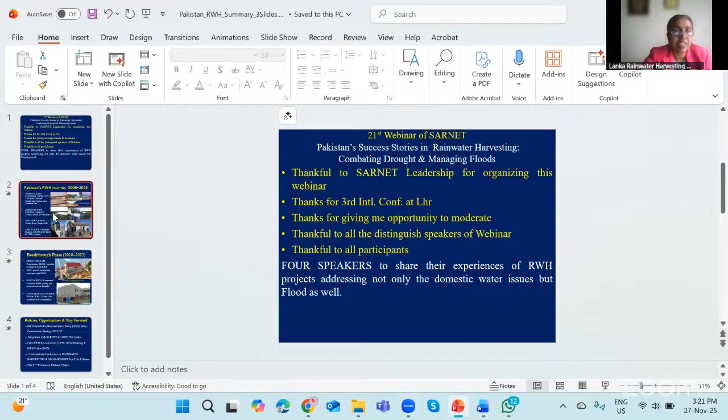So very quickly, the Pakistan scenario: since 1950 till today, we have declined our water availability. Initially, it was around 5,000 cubic meters per person. Now it is around 800 to 1,000 cubic meters per person. Can you stop, speakers? I think it is reflecting my voice.

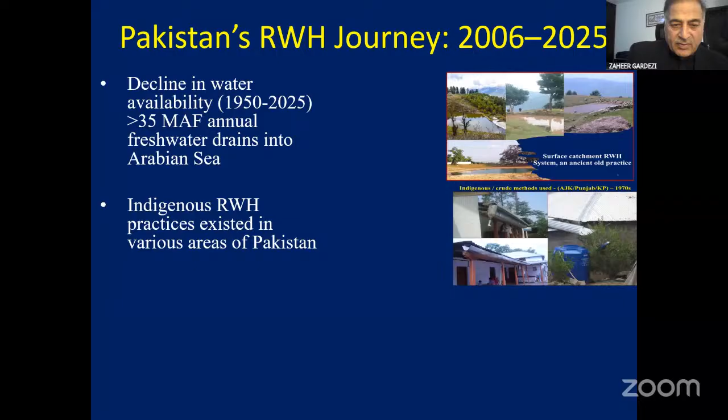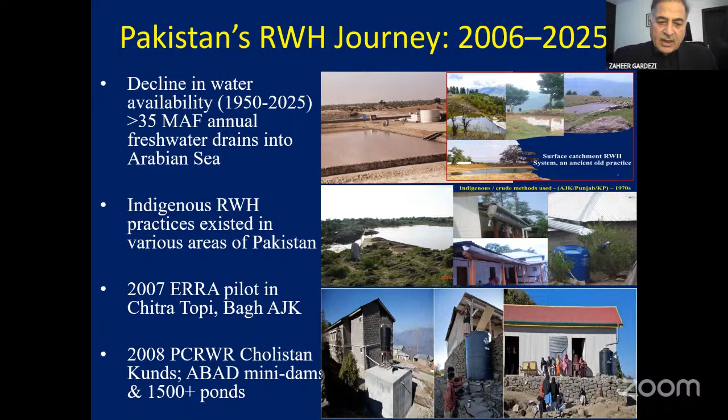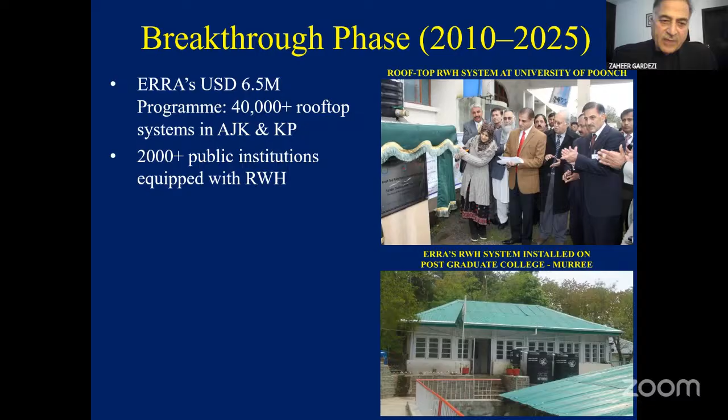Rainwater harvesting is an indigenous practice that was there in Pakistan, but since 2007 onward, after the earthquake of 2005, you can see these kind of initiatives were taken in Pakistan by the Earthquake Reconstruction Rehabilitation Authority, PCRWR, Agency for Barani Area Development, and other organizations. The largest ever initiative was after the earthquake of 2005. It was a $6.5 million program under which more than 40,000 rooftop rainwater harvesting systems were installed on private houses and more than 2,000 public institutions. And then it continued, and we have been replicating this project in many other projects.

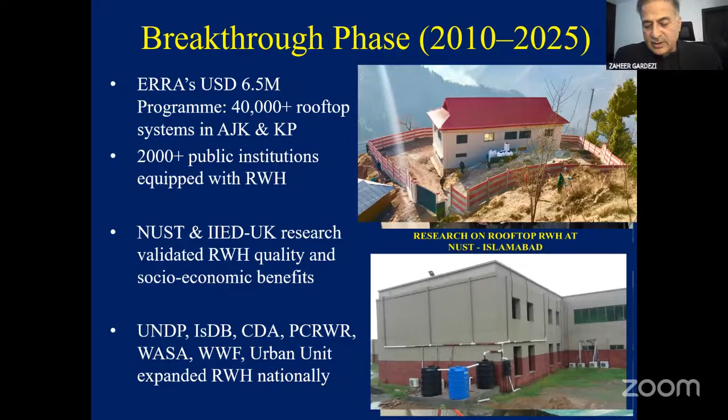Now UNDP, Islamic Development Bank, Capital Development Authority, PCRWR, Water and Sanitation Agencies, WWF, Urban Unit Punjab, and Shehersaaz, and many others are working on this. So this is a journey of almost 20 years. Now we have the water policy at the moment in Pakistan, and we have a water conservation strategy in Pakistan, to be implemented from 2023 to 2027.

Integration with SARNET and Lanka rainwater harvesting is done. Capital Development Authority has approved its bylaws. Pakistan Engineering Council has approved its green building codes and rainwater harvesting codes. It's a big achievement for Pakistan, I think. And as Danushi mentioned, we held the third international conference on rainwater harvesting in September this year. It was again a success story. And now today we are here for this webinar. So this is a quick overview of Pakistan's journey of rainwater harvesting.

I am Tayyab Malik, representing Water and Sanitation Agency Lahore. Thank you for introducing me and my organization. Today my topic is urban flood management and rainwater harvesting, and what Water and Sanitation Agency Lahore is doing.

It was established in 1976 with a mandate of provision of water supply, sewerage, and drainage services in Lahore. Initially, this agency was created under the development authorities. Now, at the start of this year, there is a change in the governance and institutional structure of the agencies. Government has now established a new water and sanitation authority in Punjab.

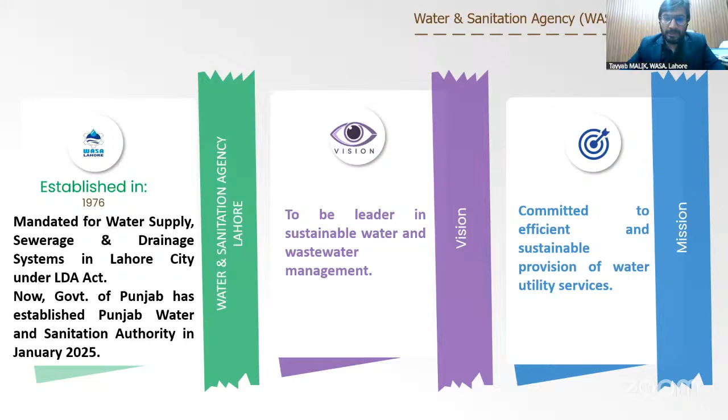Let me brief about the drainage system of Lahore. Basically, it depends upon the primary drains. There are about 7 or 8 primary drains in Lahore. Initially, these drains were constructed for the purpose of stormwater drainage, but with the passage of time, urbanization, and unplanned infrastructure, these drains were converted into sewer carriers. Now these drains carry both stormwater and sewage.

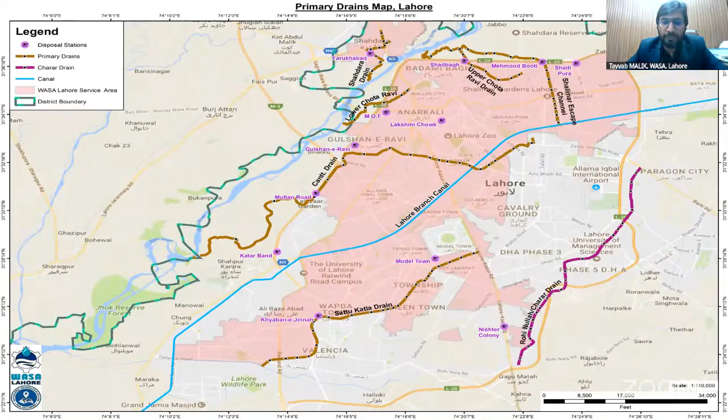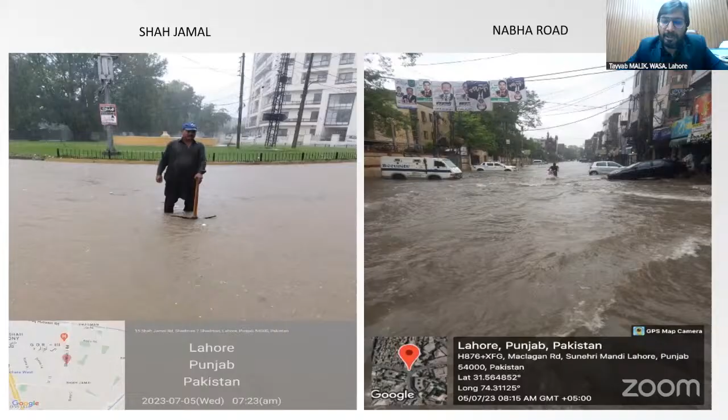What challenges are we facing in terms of urban flooding, and to cater to the monsoon? I would like to share that we have a combined sewage and drainage system. We don't have a dedicated, separate sewage or stormwater drainage system. Climate change, as we all know, is causing a lot of changes, and we are facing intense rainfall events in Lahore every year.

I have a slide where I will share details of the major and maximum events we have faced during the last 7 or 8 years: unplanned urbanization, higher impervious area, and topography. Topography is also a very major component affecting urban flooding. The topography of Lahore is totally flat, and due to infrastructure being built, we are facing a number of depressions which are causing urban flooding.

Parks and green areas are very limited. Two or three months ago, we calculated that about 9.8% of the urban area of Lahore is green area. The rest is totally covered with concrete structured roads and buildings.

Roadside drainage is also not good; we have less focus on roadside drainage. We have a lot of solid waste dumping in the sewers and open drains, and we have to mobilize a lot of resources for these activities throughout the year.

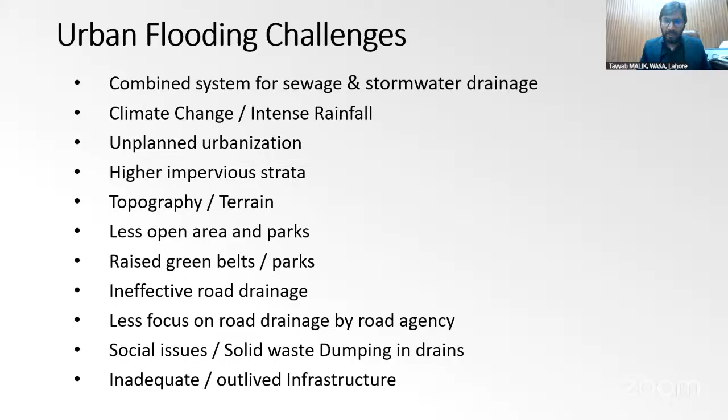I remember the day. I woke up early morning at about 4:30 a.m., and when I went to the terrace and looked at the streets, it was really a disaster. Normally, I have not faced any urban flooding in my street, but that day there was a lot of water. The first thought in my mind was that it was a disaster day for WASA Lahore.

Then we implemented multiple initiatives at WASA Lahore level. We have also encouraged domestic and commercial levels to implement rainwater harvesting. We have constructed recharge wells, and we are also remodeling or redesigning our trunk sewage system.

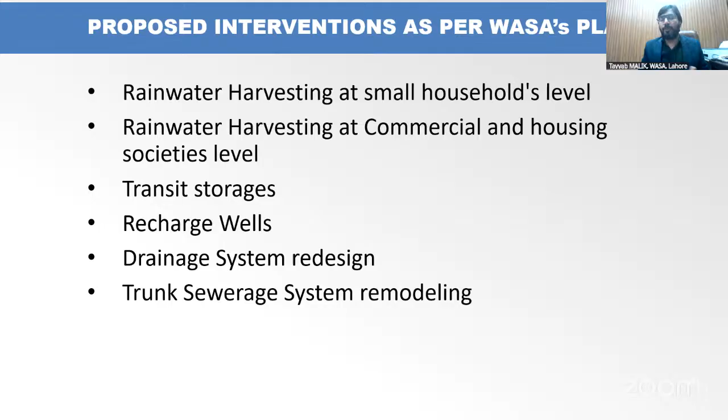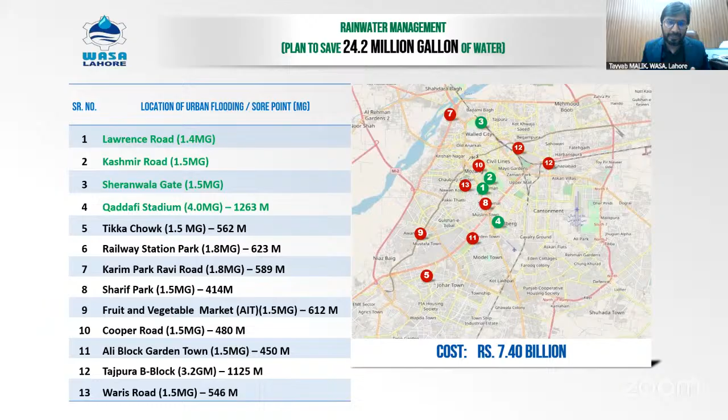What WASA Lahore has done over a few years: we have constructed about 13 underground stormwater storage tanks with a huge capacity, about 24.2 million gallons. The green ones are highlighted on the left. They were constructed over a period from 2019 to 2023, and the rest, numbers 5 to 13, we have constructed in the last financial years.

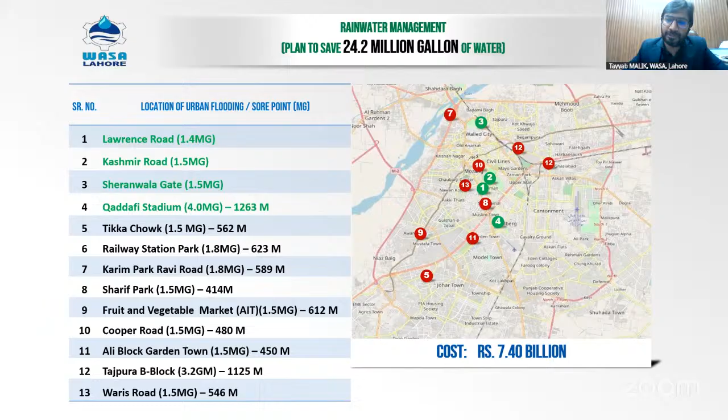All the underground storage tanks are operational, and we have constructed them in open spaces. Most of them are constructed in the parks, and after the construction of the tanks, we have restored it into a park. You can see the first one we have constructed in a garden, and after the construction, we have restored it as a lawn tennis court. Then there is also an underground storage tank. You can witness how professionally or beautifully we have established and restored the park.

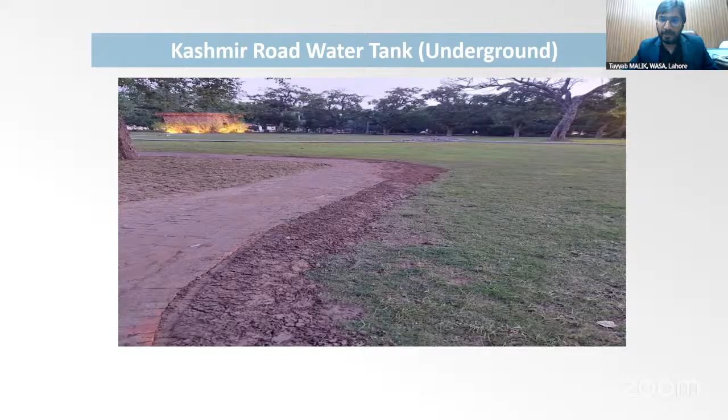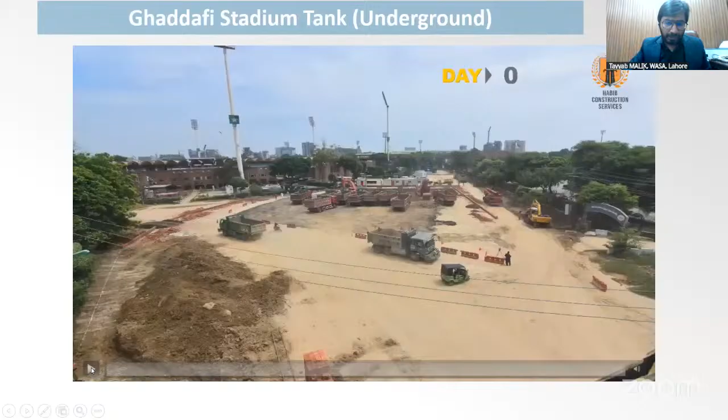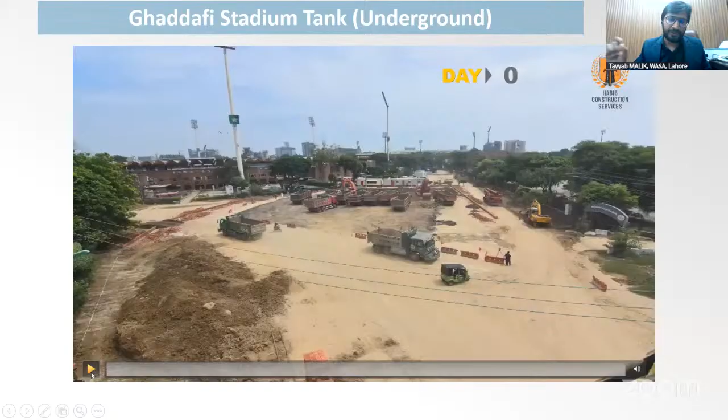These are some pictures of the execution of the stormwater storage tanks. Here I have a small video. We have constructed one of the largest storage tanks at Qaddafi Stadium in Lahore. Its capacity is about 4 million gallons. You can see we have constructed this tank because we have a Champions Trophy mission. Then after the construction of the tank, we have restored the road. No one can see the underground storage tanks.

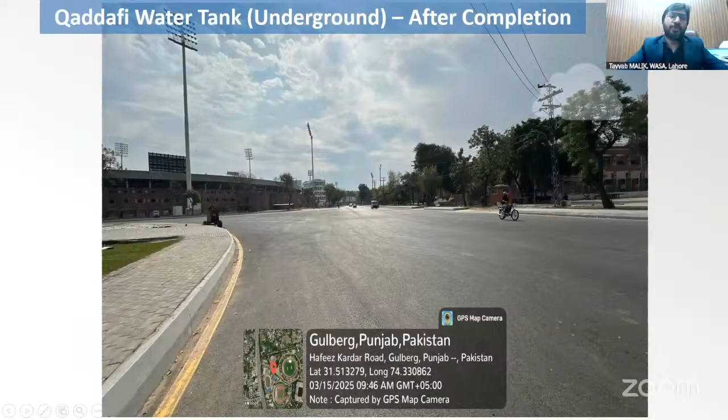The other initiative we have implemented, we have also installed a rainwater harvesting system in our multiple offices. We have connected the rooftop with the storage tanks, and after the rain and in the dry weather season, we are using the storm water stored in the tanks for gardening purposes.

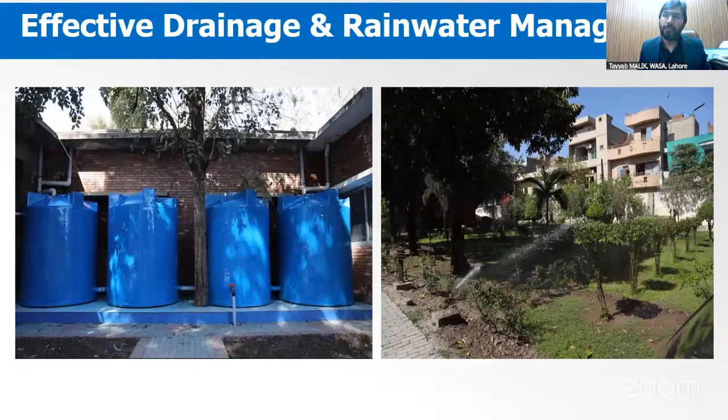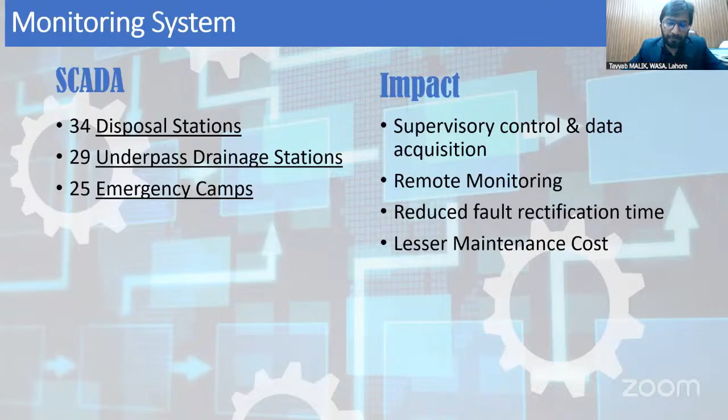We have also improved our system by installation of SCADA in our installations. WASA Lahore has huge installations. We have about 128 disposal stations in Lahore, and for proper monitoring and decision making for resource mobilization, it was a very good milestone we have achieved during the last 1 or 2 years. We have also established a control room. You can witness multiple top management from the Government of the Punjab visit it, mainly during the monsoon and emergency situations.

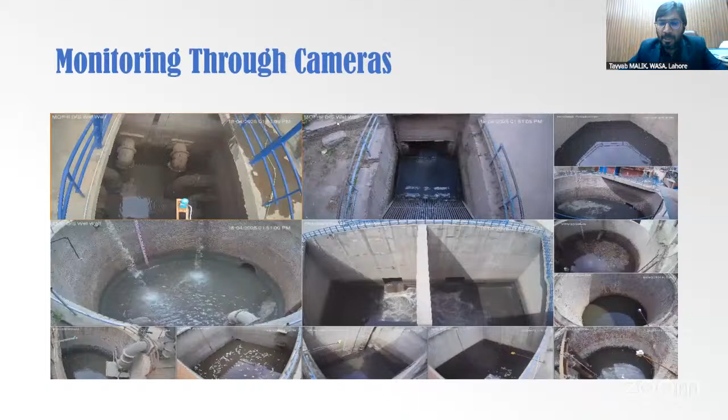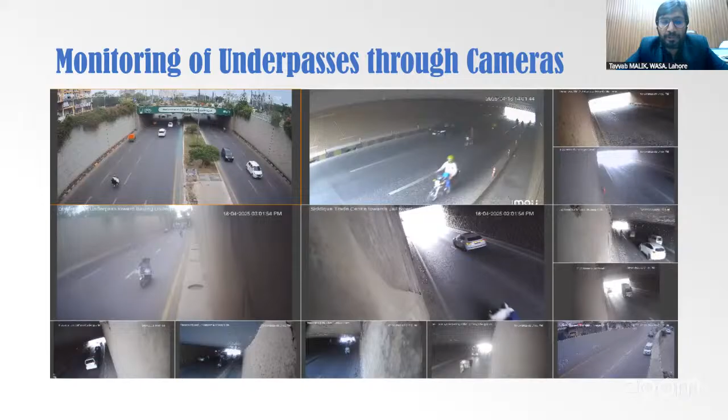You can witness we have installed multiple SCADA systems in our disposal stations, our installations, and underpasses. We have also installed cameras at underpasses to know the real position of the urban flooding in the underpasses, because we have installed lift stations adjacent to these underpasses in order to make sure the traffic flow is smooth during the rainy season.

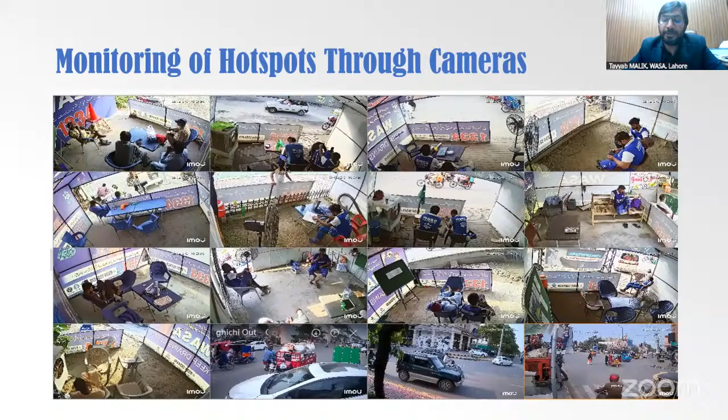Then we have also installed monsoon camps. These are temporary camps, only installed during the monsoon. Then we remove and store them, and we can reuse them for the next period.

Then this is the last one I would like to highlight. We are also implementing a project laying the trunk sewer system by the use of a tunnel boring mechanism. This project is approved and it's in the tendering phase, and hopefully within 3 or 4 months this project will be on ground. Its length is about 21-22 kilometers. At the end, we are going to construct a disposal station. This system will be laid in the central part of Lahore, which is totally crowded, and there is no space for excavation.

At the end, I would like to highlight we have also implemented recharge wells in Lahore. We have constructed three in central Lahore and three in the Johar Town area. This idea was very much appreciated by the government, and the government has planned to replicate this idea in other cities.

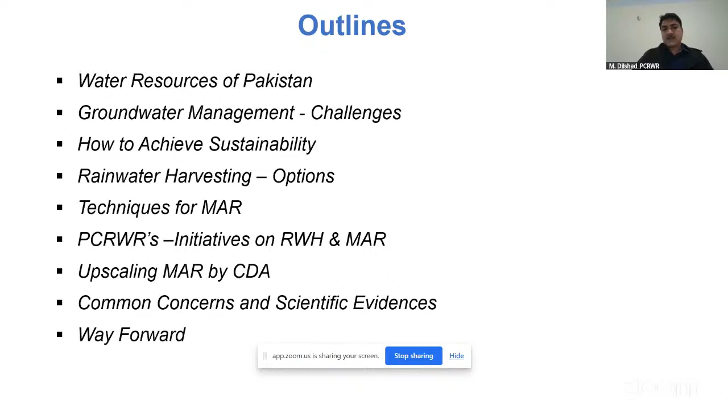So my presentation outlines are to cover the water resources of Pakistan, groundwater management challenges, and how to get sustainability, the rainwater harvesting options, the techniques for MAR, the different R&D initiatives taken by the PCRWR on rainwater harvesting and MAR, and their upscaling by different agencies like CDA, the common concerns and the scientific evidences, and lastly, the way forward.

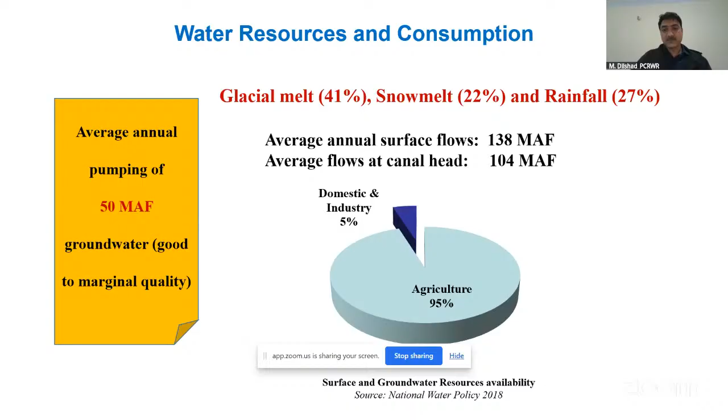So if we look at the overall water sources of the country, we receive annually on average 138 MAF surface water, and we rely on 50 MAF of annual pumping to fulfill the needs of our agriculture, domestic and industrial sectors. For groundwater resource management and the challenges, the number of tube wells currently operating counts for 1.4 million, out of which 85% are installed only in Punjab. The Punjab Irrigation Department conducted a survey in 2024 and completed the georeferencing of tube wells, which now number about 1.3 million, up from 1.1 million.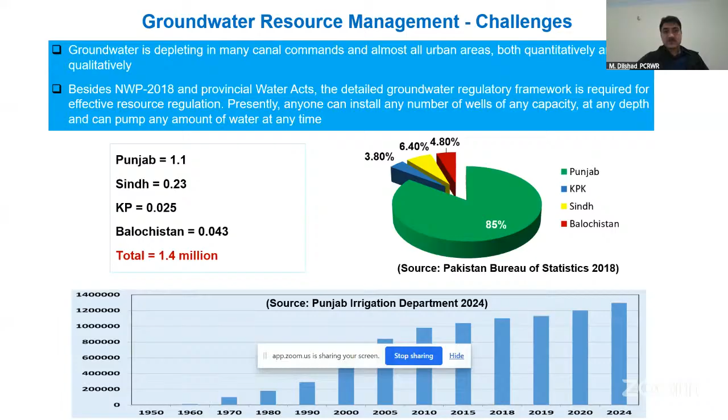So overall, groundwater is depleting in many canal commands and almost all urban areas. And besides the National Water Policy 2018 and the Provincial Water Acts, a detailed groundwater regulatory framework is still required for effective resource regulation. We are also facing climate change and urban flooding, as my colleague reflected about the Lahore situation in the monsoon. Similarly, in Islamabad, the E11 example is there, and in all metropolitan cities we are experiencing this kind of flooding in the monsoon.

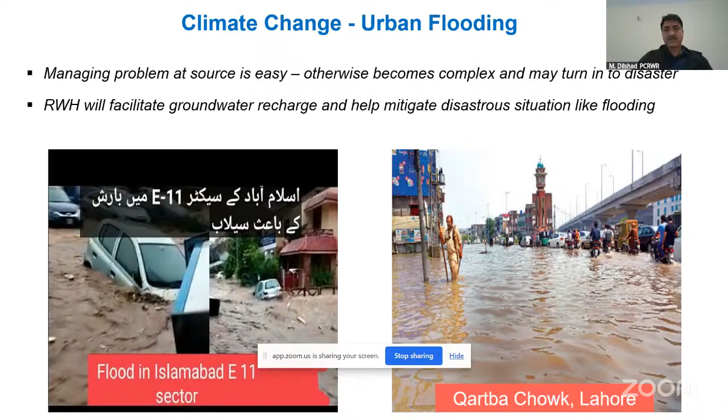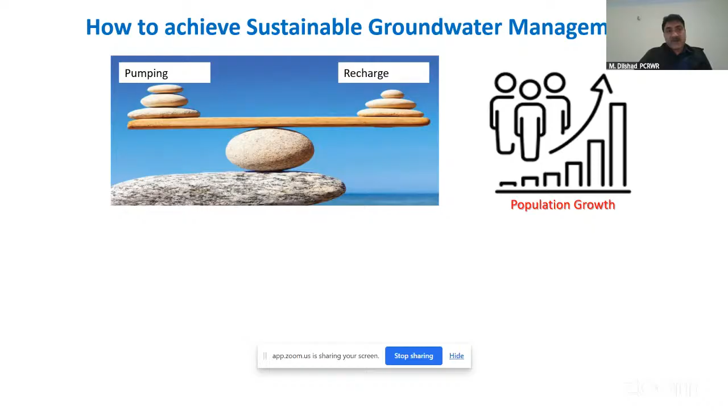So how to achieve sustainability in groundwater? On one side we are depleting our aquifer, and on the other side, in the monsoon, there is an abundance of water. Sustainable management of groundwater needs a balance between pumping and recharge. We can manage it either by reducing pumping and optimizing water requirements, or by enhancing recharge of the aquifer through nature-based solutions. The National Water Policy and the Provincial Water Acts highlight the need for resource conservation and regulations, ensuring sustainable groundwater management.

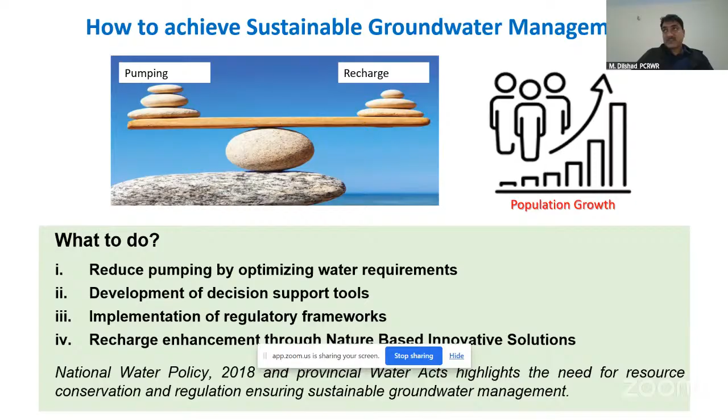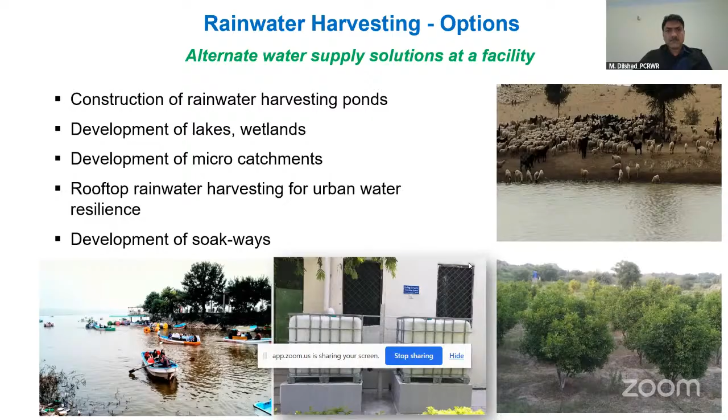So here are the managed aquifer recharge techniques. There are different kinds of techniques, implemented based on the hydrogeological and surface conditions. Every technique is not feasible everywhere, so according to the different hydrological conditions, different techniques are applicable.

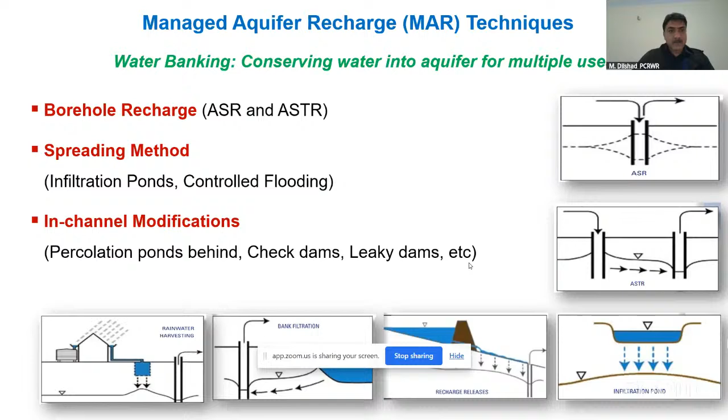So now I would like to particularly highlight the R&D initiatives focused on rainwater harvesting and managed aquifer recharge carried out by the PCRWR across the country. We have developed demonstrations for urban areas as well as for the arid to hyper-arid areas of the country, like the deserts, the Cholistan desert, the Thar desert, and even in Balochistan and KP. So I will go quickly through them one by one.

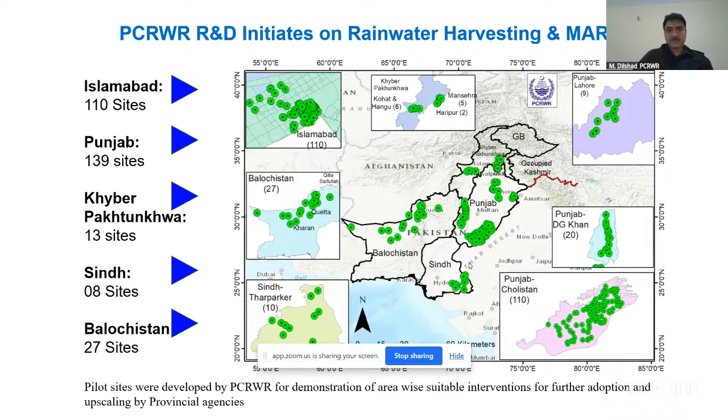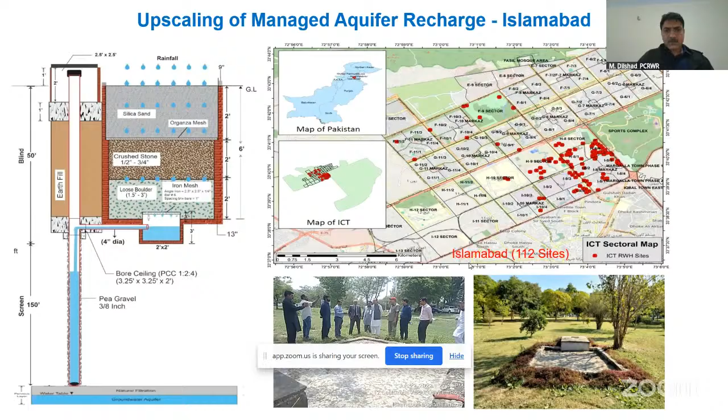So here is just a video of how the recharge well works. I guess I have to pass it quickly.

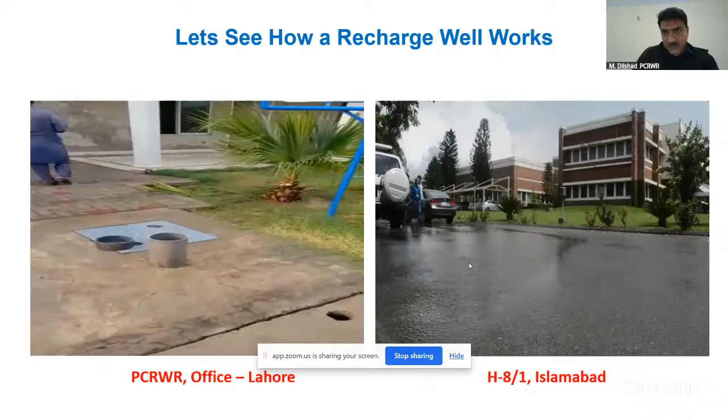We can see that after passing the filtration plate, clear water is going into the bore with appreciable velocity and quantum of water, and the bore is simultaneously accepting the whole flow and quickly recharging it. So this is how the recharge well works. After completing the 112 sites, the overall cumulative recharge quantum achieved so far is around 214 million gallons, recharged by the CDA sites in Islamabad.

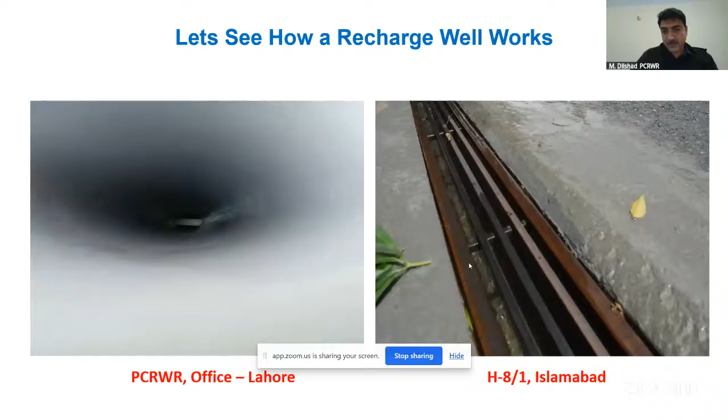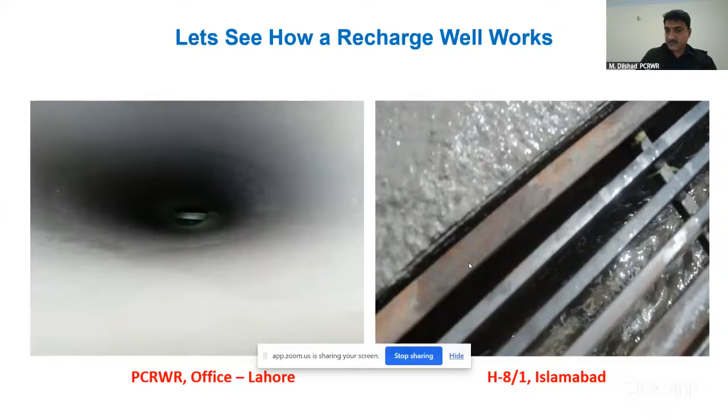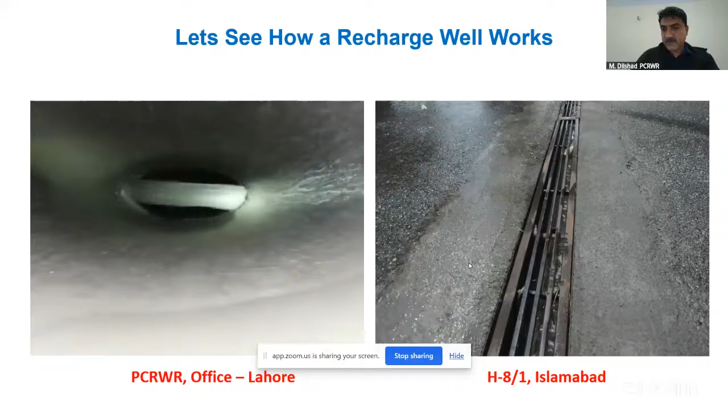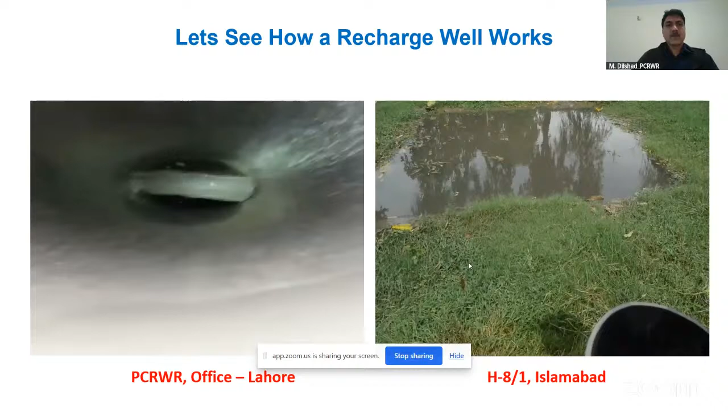If we talk about the economic analysis, the cost per unit volume, we have evaluated that at PKR 10 per 1,000 liters you can achieve the recharge through these kinds of interventions. Simultaneously, we worked on rooftop rainwater harvesting and demonstrated successful pilots in Islamabad and in different areas of the country.

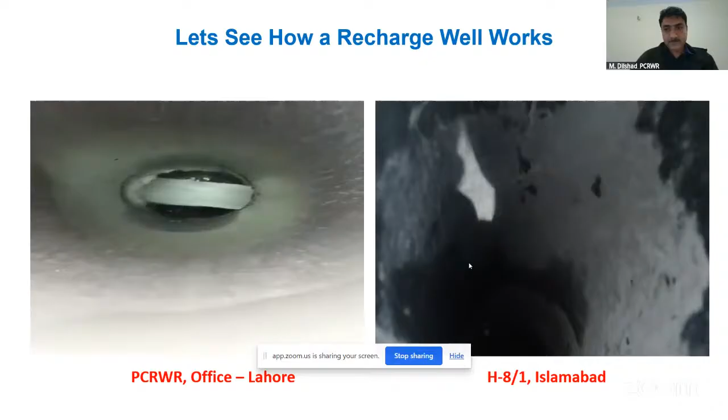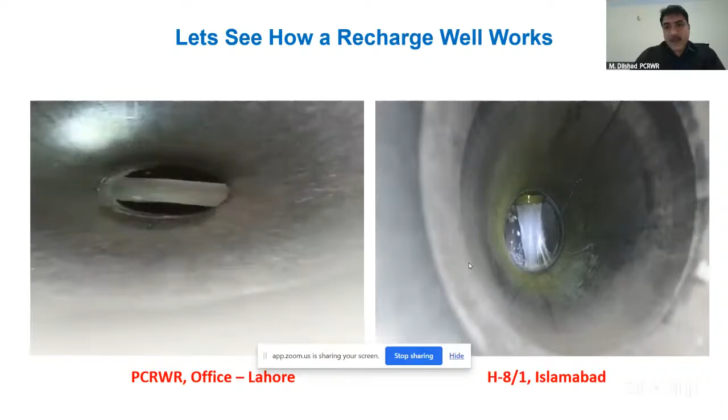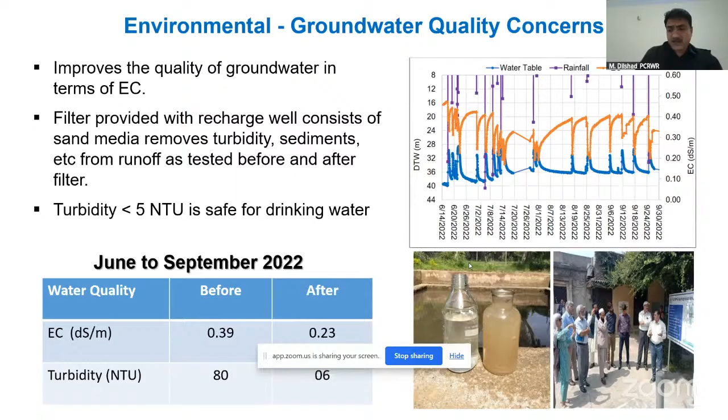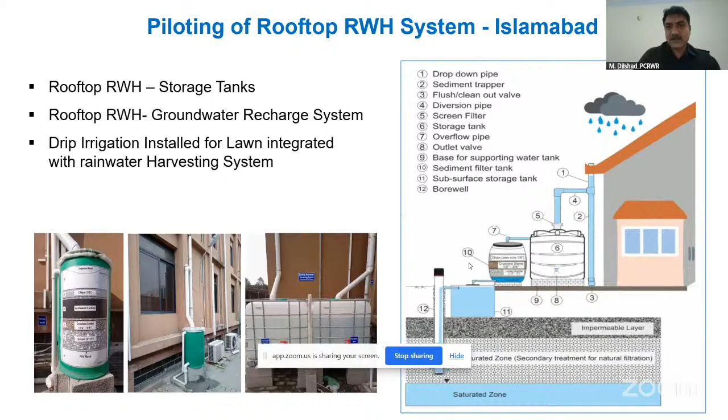Similar kinds of interventions were also demonstrated for the Thar desert in Sindh, developing rainwater harvesting ponds and tankas, the small structures for drinking water needs.

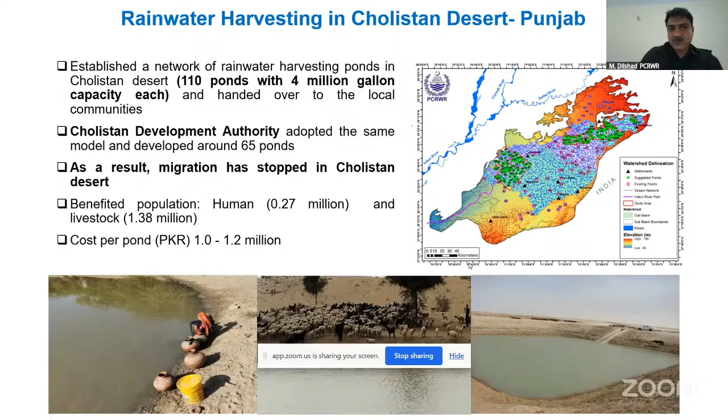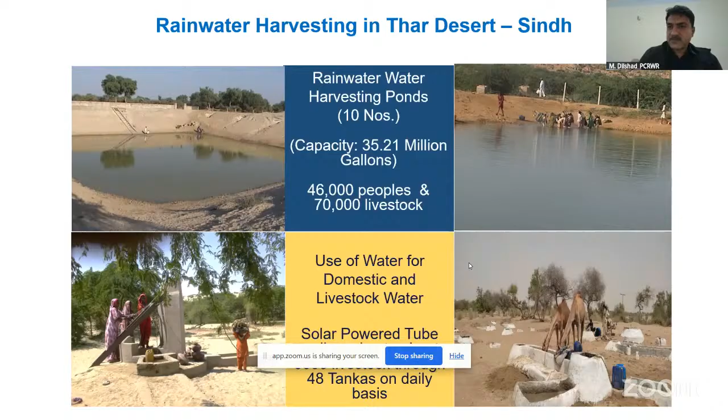So here is the reflection of a managed aquifer recharge catchment model which we have implemented in Balochistan. It's a series of gabion structures provided with inverted wells. It is also called a leaky dam. This model was implemented to rehabilitate the karez system. Basically, in the recharge zone of the karez system, these interventions were carried out to enhance the recharge process. We evaluated and monitored the flow of the karez, which increased from 0.3 cusecs to 0.75 cusecs.

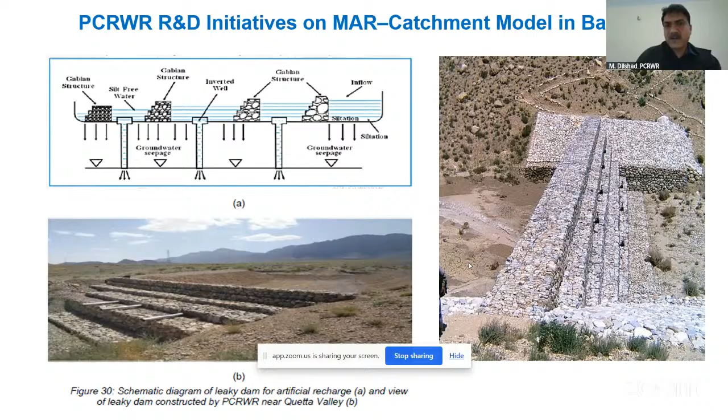Similarly for KP, similar kinds of retention ponds and gabion structures were effective. 7 sites were developed in the Kohat and Hangu districts with a capacity of 16 million gallons.

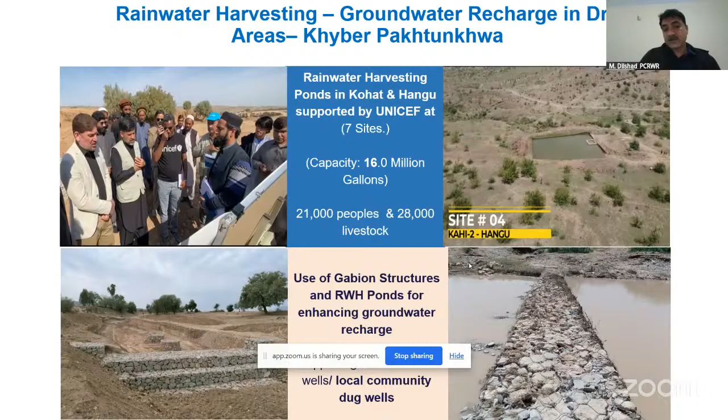We have also been focusing on creating awareness and particularly capacity building trainings. Recently we have completed a training course where 107 officers in 4 batches from Khyber Pakhtunkhwa and WASA Rawalpindi were trained on rainwater harvesting techniques, developing proposals, and implementing these kinds of initiatives.

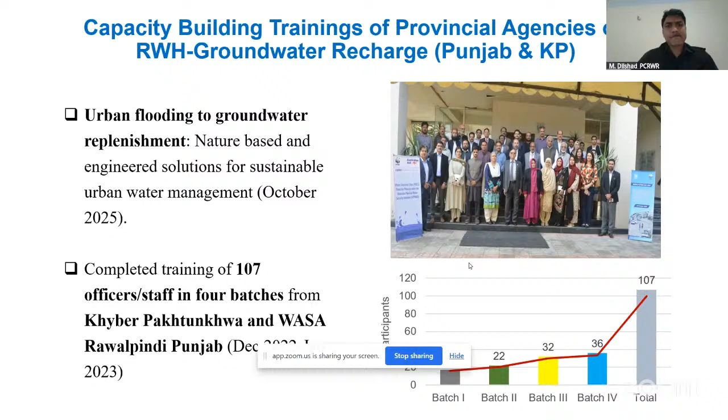So here I would like to reflect that after the successful pilots, the long journey which has completed, the PCRWR provided basically the technical consultancy services to develop the 112 sites in Islamabad. And jointly, it was the first ever where the development agency and the research agency worked together. And after completion of this project, the CDA realized the importance of this harvesting, and they made the amendments in their bylaws by August 16, 2023. That was a great success story.

And in the meanwhile, also in 2025, the PEC green building codes have been approved by the federal cabinet. These are applicable to the residential, commercial, and all industrial buildings. Following this, another success is the provincial level adoption. The Punjab Government Environment Department has also made the installation of rainwater harvesting mandatory for all new construction projects by April 17, 2025.

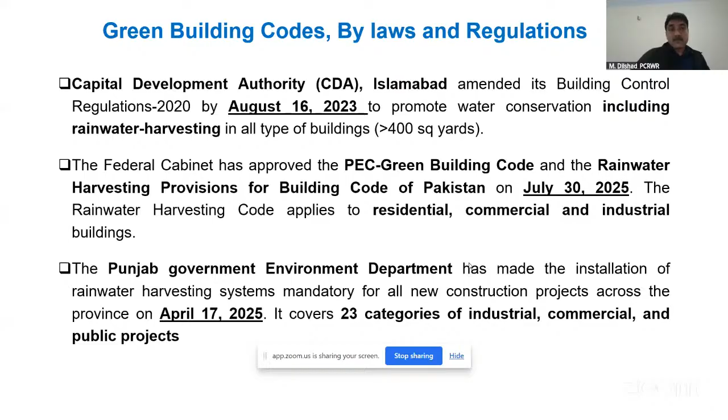So overall, if I summarize, MAR should be an integral part of all water-related projects, specifically the water supply schemes, public and private buildings, housing societies. Following the successful pilots on MAR, the CDA Islamabad amendments in the building bylaws, PEC green building codes, and EPA Punjab regulations for rainwater harvesting are very encouraging. However, the enforcement of these regulations is equally important for widespread adoption.

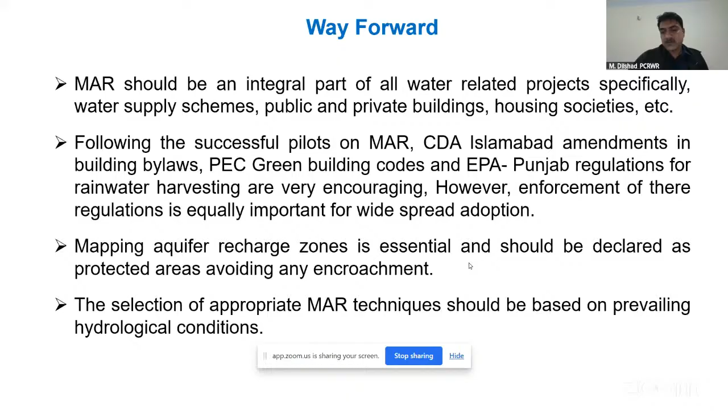And the mapping aquifer recharge zones is essential and should be declared as protected areas, avoiding any encroachments. The selection of appropriate MAR techniques should be based on the prevailing hydrological conditions. Thank you very much.

Thank you very much, Dilshad Sahab. Very interesting presentation and really concrete work you have done. I am witness of your Cholistan projects in 2006-7. We started from there, collecting rainwater in an arid area which receives less than 200 millimeter rainfall. It was a good initiative at that time, and it was a success story. But now we have come to this managed aquifer recharge.

And this is good that most of the housing authorities and housing societies are adopting this, what I have learned during these last 3-4 months. And the good thing is that, because this requires technicians which are not available in the market, the National Vocational and Technical Training Commission, in collaboration with GIZ, has started developing a curriculum to be taught in the vocational and training institutes to raise the number of technicians in water conservation, and I am part of that. Thank you very much for this interesting presentation.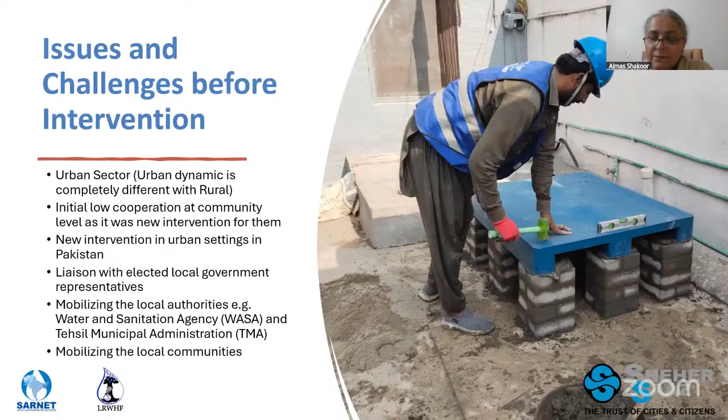nullahs in Rawalpindi. If you are familiar with Rawalpindi's topography, in 2010 and 2002 we faced very severe disasters in Rawalpindi. But as time went on, despite facing a number of challenges, as we moved forward, people started to realize that they have some benefits as well.

As time passed, people and government agencies realized the benefits and how we can harvest rainwater, because harvesting rainwater is a very new concept for the urban community. Although it's very old, implementing these interventions at the community level, especially in urban settings, is new. When Gardezi Sahib started this initiative back in 2005, it was quite a new concept to harvest rainwater for domestic purposes.

But gradually, we are also seeing a number of benefits and receiving very positive responses from other agencies and other communities, not only the communities where we are already working. These are the benefits we have received after installing rainwater harvesting at the community level. Now these communities have water available in the dry seasons, because in summer, June and July, the water level has been declining day by day, but they can use this water in the dry season.

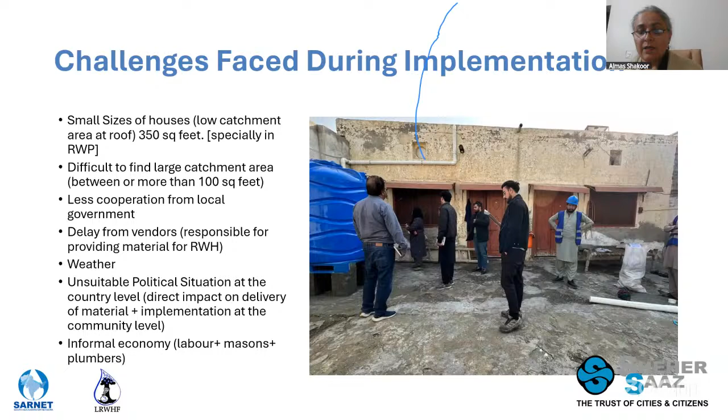Another problem we have is that it is an informal economy. These laborers, masons and plumbers are from the local masonry, local labor force, so we are not hiring externally. Okay, so these are the things you can see over here - the plumbers equipped with PPEs.

These are the recommendations for applications. One is we can go for policy and institution support - we can integrate rainwater harvesting into building codes and master plans. We can also provide financial incentives or subsidies to the households. And we can also encourage public-private partnerships.

And we can engage the community. We can promote school and community-based demonstration projects to inspire replication. This activity we are also doing - we have done it in 18 public schools in Rawalpindi and 25 schools in Nowshera.

We can also design and conduct awareness campaigns to highlight the benefits of rainwater harvesting and connect it with water scarcity and flood mitigation. We can also customize the designs with us and involve the community and local government institutions. So these are more interventions in design improvement.

We can train the local communities to harvest rainwater. At this time, we have trained more than 6,000 beneficiaries on how to harvest rainwater at the household level.

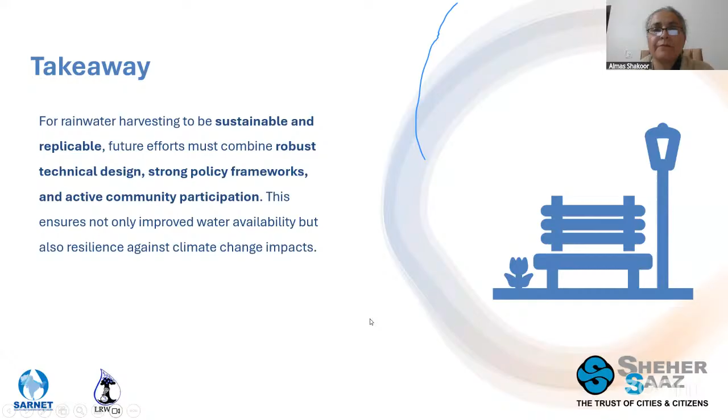That's why the nomenclature of our initiative at that time was promotion of rainwater harvesting. It's like solar - everyone is installing it at their own cost because it's a need. But water is a little bit different. Subsidies, yes, but with the passage of time we need to reduce the subsidies so that people should realize we have to save water.

That should be the main objective. At the end, one thing I will share with all the participants listening: we have a YouTube channel. If you are able to visit us, all the rainwater related things - how to harvest, how to install - each and everything is available on our YouTube channel as well. All the information is also available on our website, so if you are interested you can visit and contact us.

Exactly, that needs to be promoted like PCRWR, now groundwater recharging, and that's the realization. Now NAVTTC is producing this manpower, that manpower is available, and whosoever intends to get rooftop rainwater harvesting, recharge, or any other types of rainwater harvesting, the manpower is available.

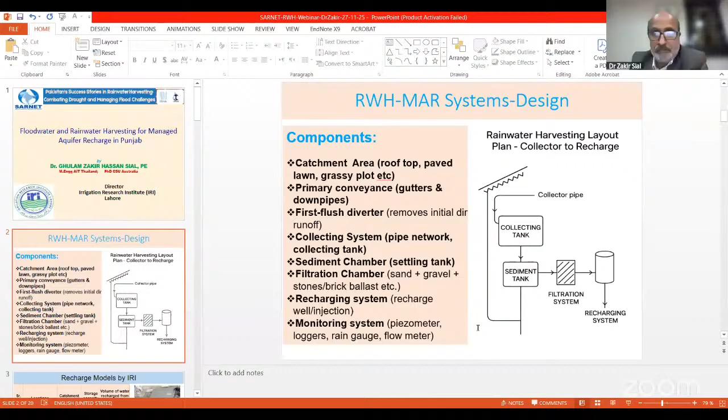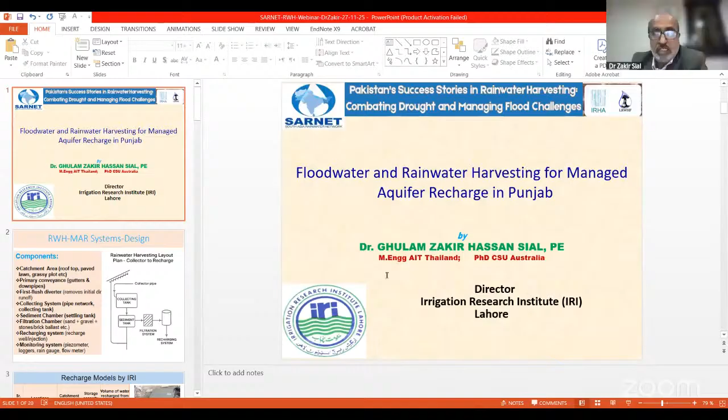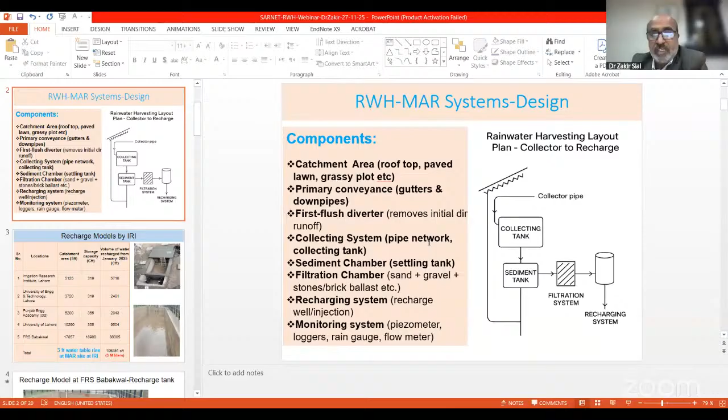So this is another recharge model which we installed in 2020. I will just show how it is working. So this is the rainfall being collected from a clean and neat park, which is contamination free. And then it is coming into the collecting tank, into the sediment tank, and then ultimately it goes to the filtration mechanism, and then it is recharged through a recharge well.

On the right side we can see this. This is a recharge well, and we have tested the quality of this water, very fresh and contamination free water, and we have given 2-3 inlet pipes so that we can expedite the recharge rate. So this is one of the success stories.

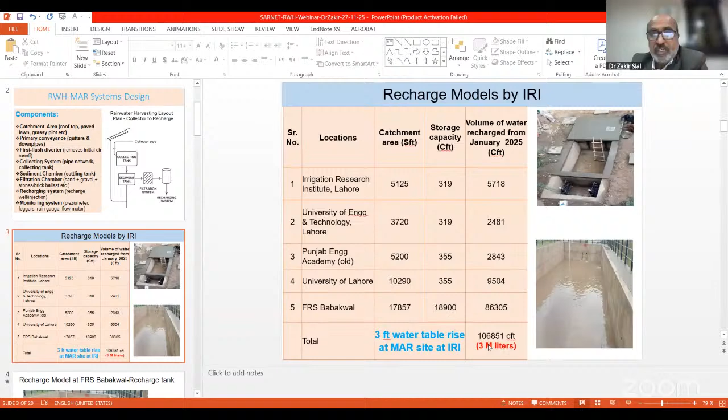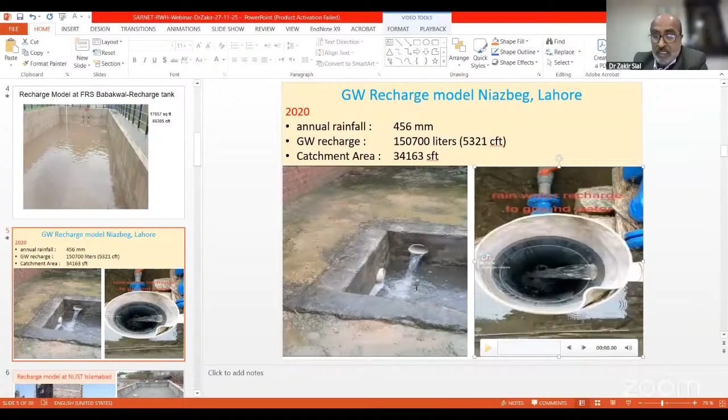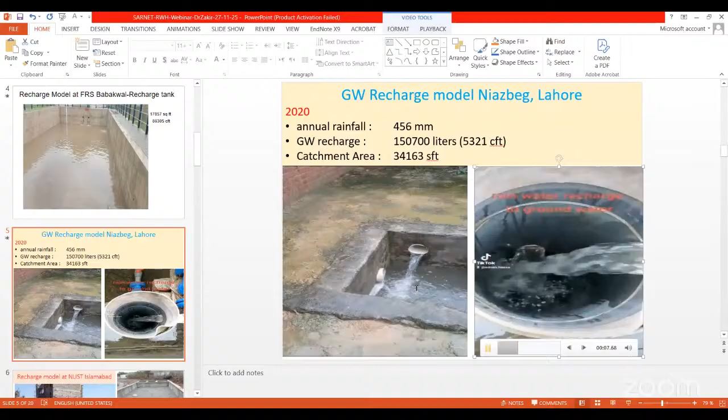I think his connectivity is a little bit low, and Dhanushi, we are running short of time. Yes, we will take the questions, because there were two raised hands, from Mr. McPherson. Dr. Saab, we can hear you next time, inshallah. We can upload your PowerPoint presentation on the website of SARNET, and let us have a question answer session at the moment. Yes, Dr. Saab, we can hear you, but we are running short of time. Can you conclude in 1 or 2 minutes? If you agree, we can have your session sometime next in the webinar. At the moment, we can have question answer from previous speakers.

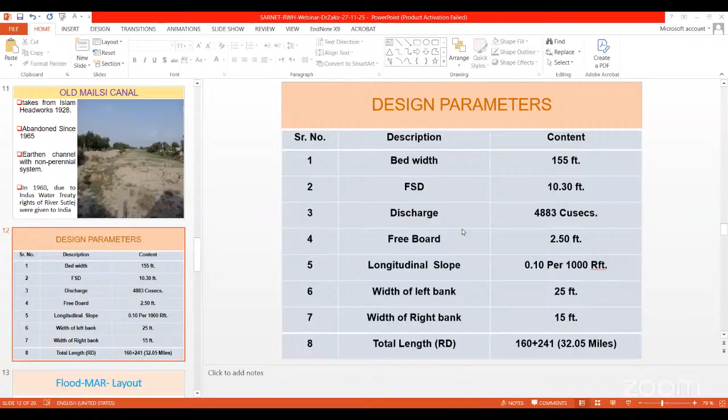I wanted to check with the second presenter. He mentioned the laws and regulations, but I wanted to find out, with these laws and regulations, how is the enforcement done? Do you have a regulatory authority that enforces these laws and regulations? Are there fees and penalties to ensure compliance with these laws and regulations? That was my only question. Thank you.

I think Dr. Dilshad can reply to that.

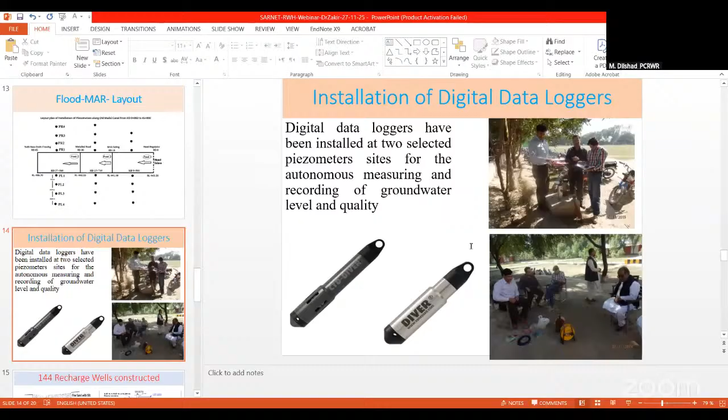Yes, sure. As you notice, these are very recent developments, and those happened in 2025: the PEC building codes, as well as the EPA, who has developed the bylaws for rainwater harvesting, in force. So let's see in the coming future that all the enforcement goes on. I'm also very much keen to see the enforcement of these rules and regulations.

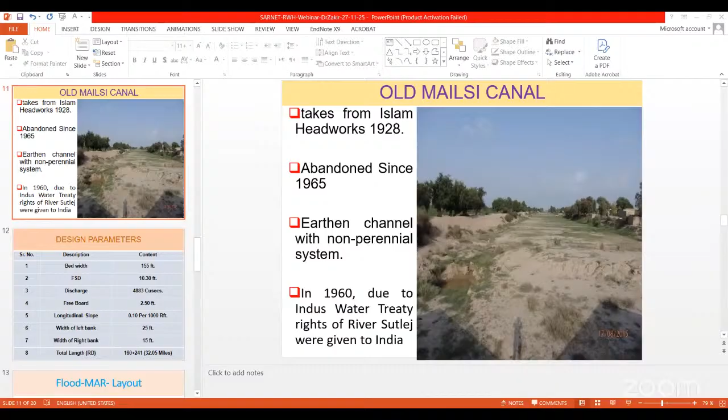Yeah, basically for implementation we have the regulatory authorities, like all the housing authorities, capital development authorities, water and sanitation agencies. These are the agencies not only to implement but to regulate as well. That's why, if you have seen my presentation, I prepared two or three slides. It's a long journey. Now we have the policy, we have the building codes, and as you have seen, there is a lot of demand in all the cities, particularly in urban areas, which was really difficult before. Almost 5 years back, no discussion was taking place in urban areas.

But during last year's flood particularly, and before this we had a flood situation in 2022 as well, the realization is there that rainwater harvesting is not only for dry spells, but also to manage flooding. So in urban areas now, with the regulations, I have heard and met many people saying that almost all the housing authorities, housing schemes, and housing projects are going to implement rainwater harvesting. So let us hope it will be implemented.

Dr. Muhammad Khurram Shahzad Sahab, please. Ji, thank you very much, Zahid Gardezi Sahab. It was very nice of you to invite us to this session.

My question is to our first presenter, Mr. Tayyib Malik from WASA Lahore. I was interested to know how your venture on recharge wells worked, because what I've heard from my colleagues is that over the passage of time the filter media chokes, and the recharge well that functioned initially loses efficiency over time. So how do you cope with this problem in recharging the aquifer, the groundwater? I'm interested in that.